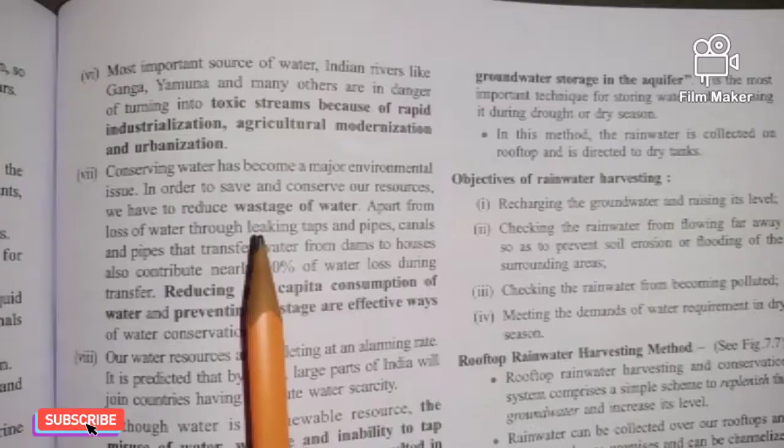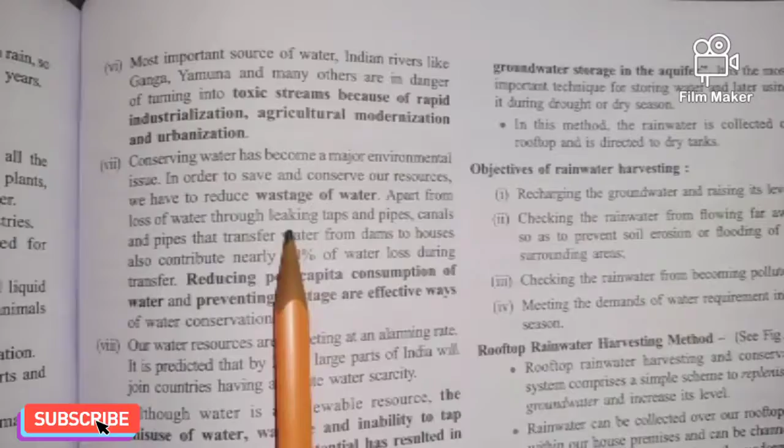Conserving water is one of the great challenges from the environmental point of view, because in order to save and conserve water resources, the foremost thing to be done is to reduce the wastage of water. Knowingly and unknowingly, water is wasted in great quantity, especially due to carelessness in bathrooms and washrooms. Taps are leaking, and there is a lot of discharge of water.

In other cases, most of the water is transported using canals and then pipes through dams, and during this transportation process, approximately 50% of water is lost. Because of that, there is a great need for conservation of water.

It is said that the per capita consumption of water has to be reduced, and some great methods of avoiding wastage must be applied.

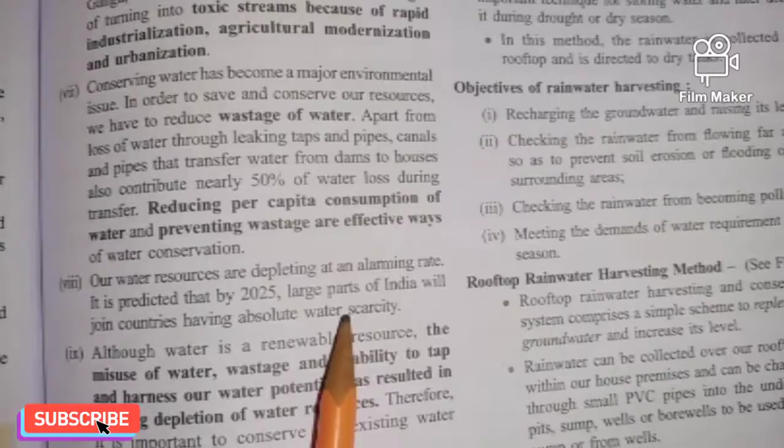The next point is that, though water resources are depleting, if this rate continues, by 2025 a larger portion of India will face severe scarcity of water, which will put India among the countries with absolute water scarcity. In order to avoid this, we should conserve water.

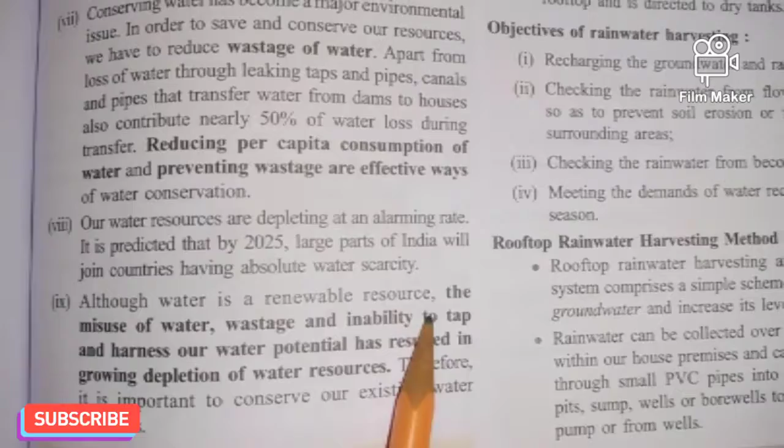The last important point on why we need to conserve water is that it is universally accepted that water is a renewable resource, but water is misused by industries. In homes there is a lot of wastage of water, and this wastage is not stopped. There are no proper functionings or methods to stop the wastage of water, and we cannot harness our water potential. Because of all these factors, there is a lot of growth in the depletion of water resources.

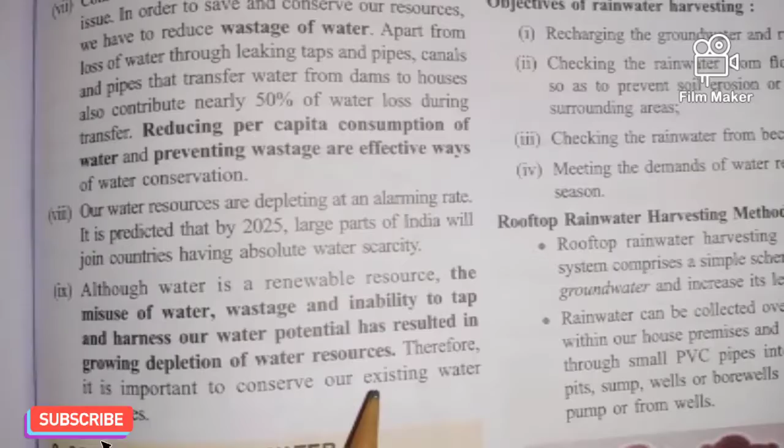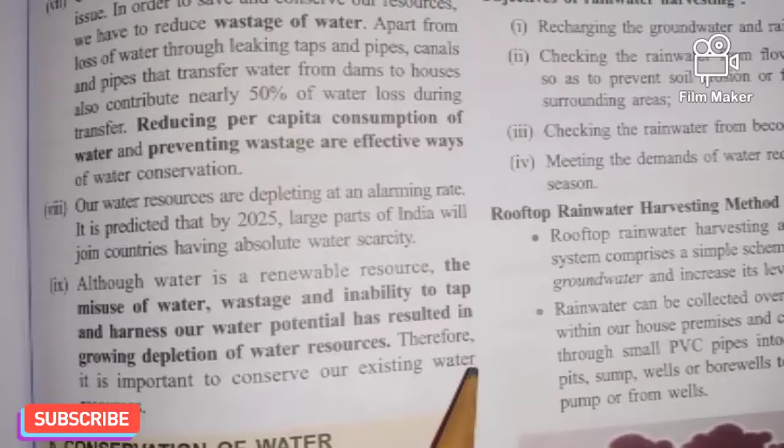So overall, considering all these points, we should feel that there is a great need to conserve water for the present generation and for the upcoming generation, because water is an essential part of life.

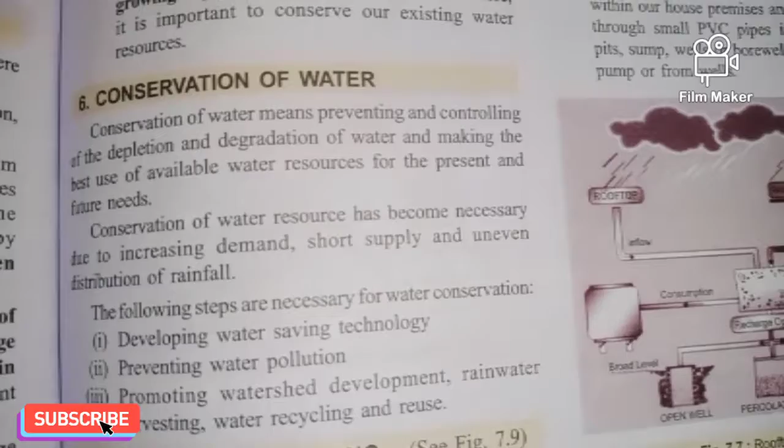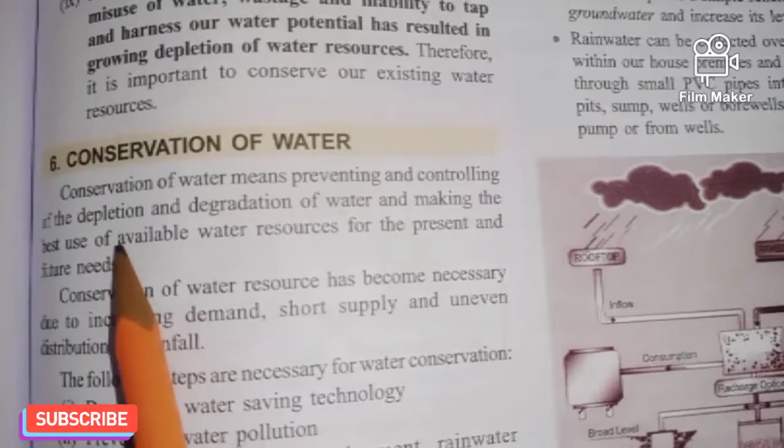Then there are some methods widely accepted to conserve water. Here we shall take a look at the factors and how we can try to conserve water. Conservation means preventing and controlling the depletion and degradation of water, so that the same water is utilized at its best level, not only for present but also for future needs. This is called conservation of water.

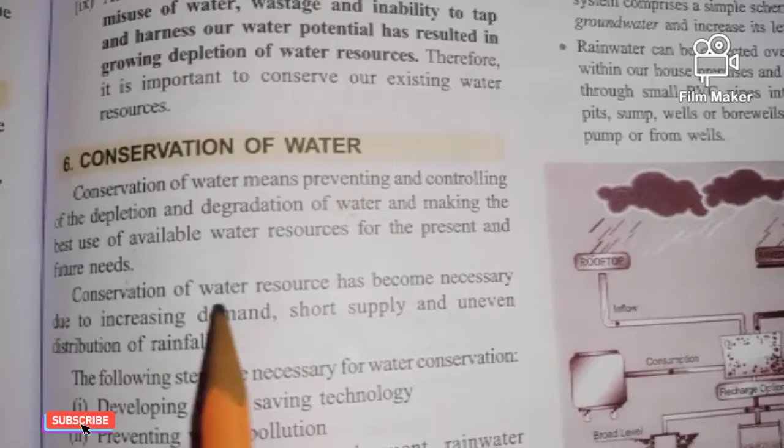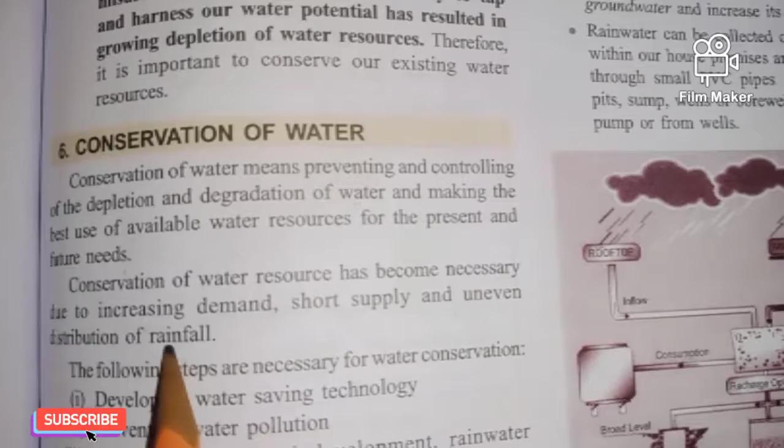Water, though it is an essential part of life, is in great demand, and there is an increasing need for it. There is a short supply and uneven distribution of rainfall. Due to this, conservation has to be done in a proper way.

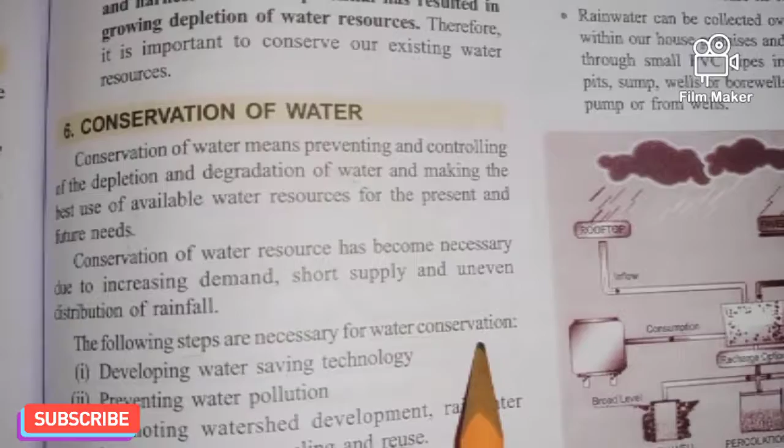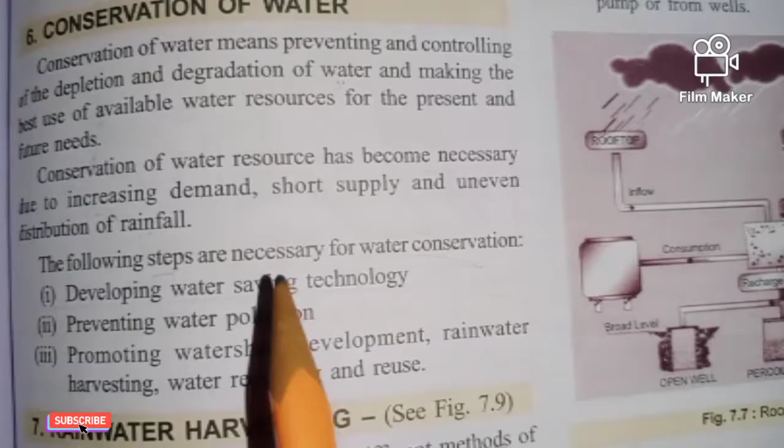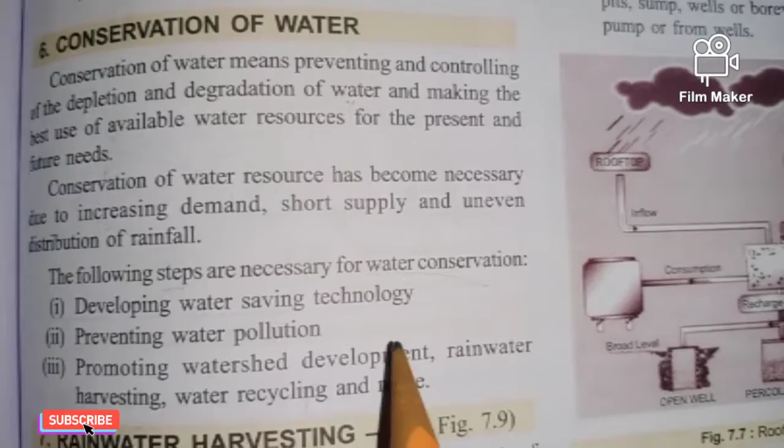So there are some steps recommended for the conservation of water. First, developing water-saving technology. We should develop technology that looks into saving water, because wastage of water has a great percentage in India. Then we need to focus on how we can prevent water pollution. Third, we need to promote watershed developments, rainwater harvesting, and water recycling and reuse. These are some of the modern methods we need to apply, and they are widely accepted to conserve water to a great extent. So we should focus on rainwater harvesting.

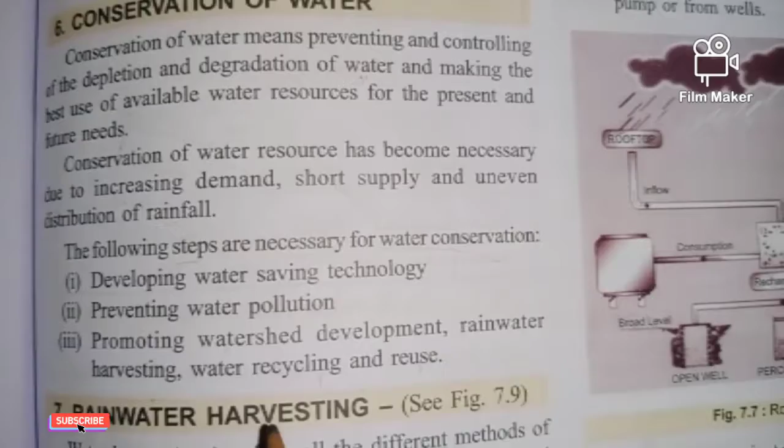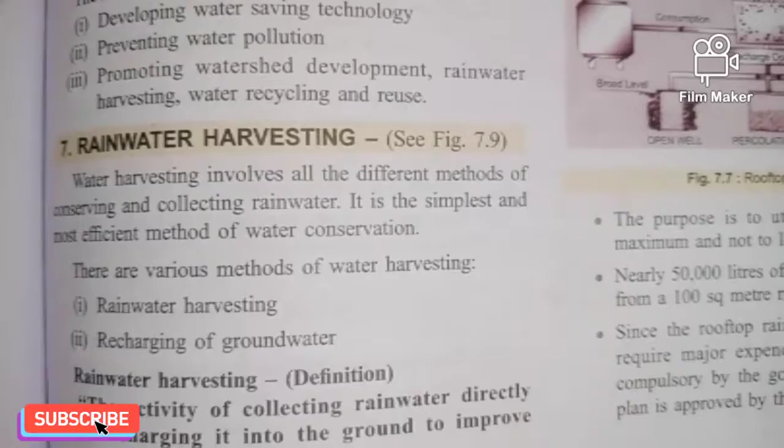This is one of the most essential and easily available methods for the conservation of water. So now we shall discuss rainwater harvesting, its methods, and how it is helpful in the conservation of water. Let's take a look at this effective method of rainwater harvesting.

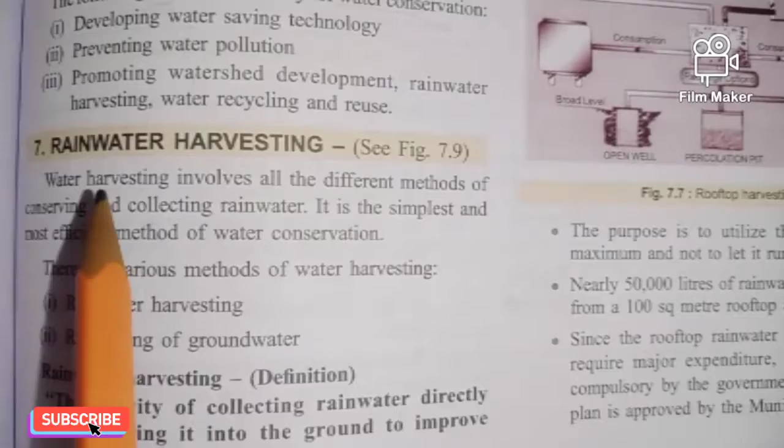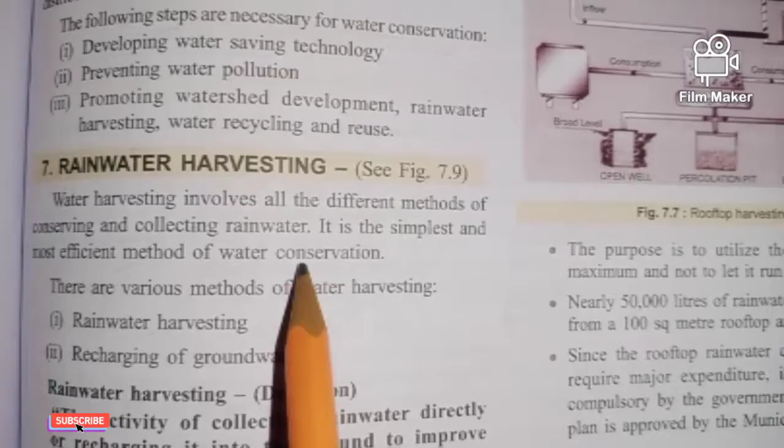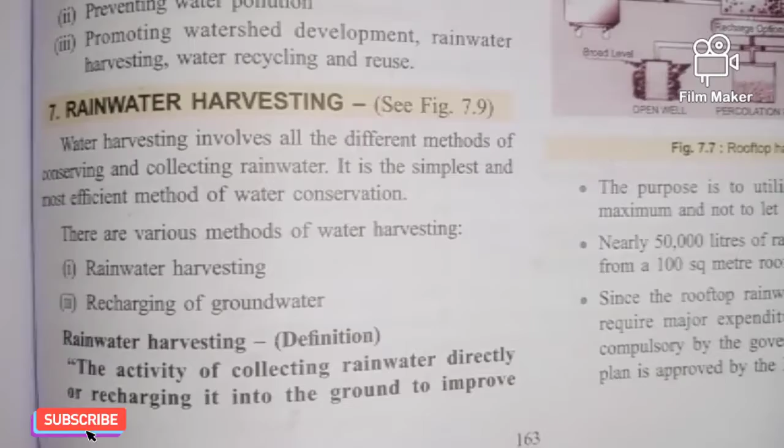Water harvesting means in this method we not only collect the water but also conserve it for future use, especially the rainwater. This is one of the simplest and most efficient methods of water conservation, because it doesn't require lots of technology, methods or investments, and it is easily applicable in most parts of the country.

Water harvesting by rainwater can be done by two different methods: first, rainwater harvesting, and second, recharging of groundwater. We shall study about these one by one.

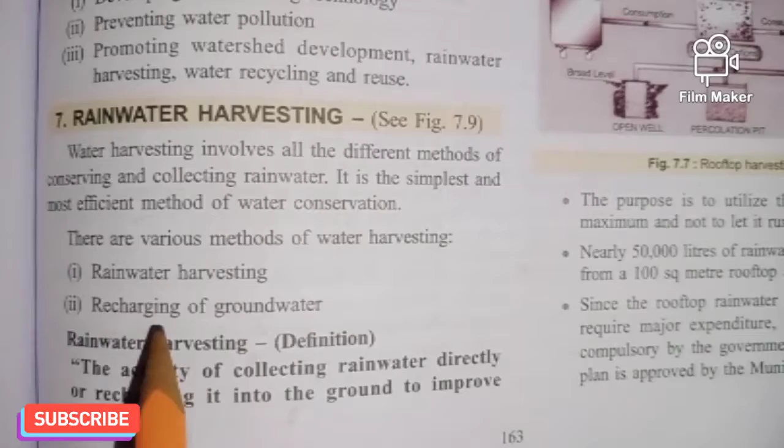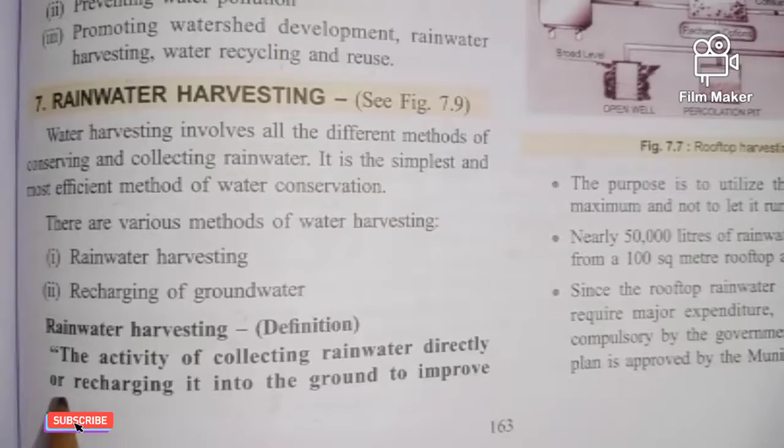What is meant by rainwater harvesting? Rainwater harvesting means the activity of collecting rainwater directly, or recharging it into the ground to improve the groundwater storage in the aquifer. It is the most important technique for storing water, and it can be used during dry and drought situations.

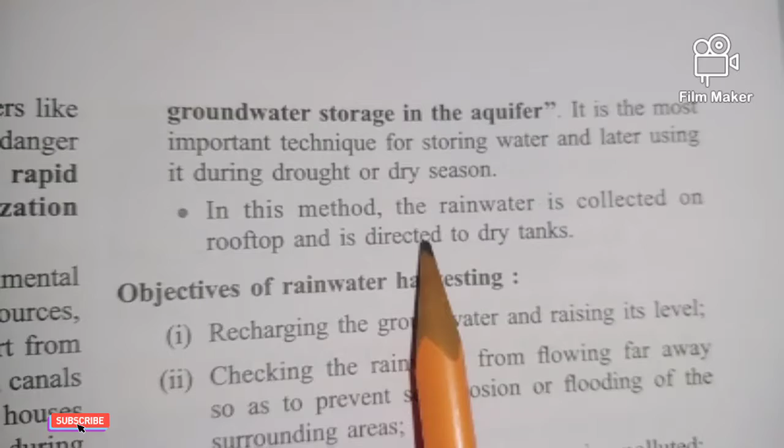While rainwater harvesting, the water is collected on the rooftops, and from there it can be directly led or transported to the dry tanks.

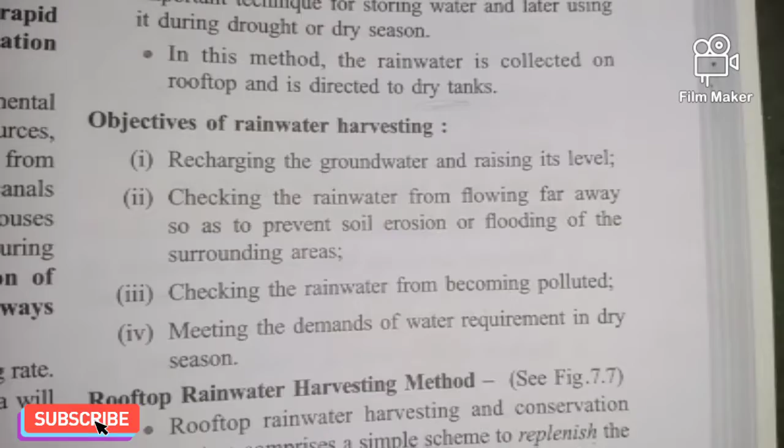Once we decide to have rainwater harvesting, why should we do it? It's not only the method of conserving water, but there are multiple usages of rainwater harvesting. The first one is recharging of groundwater and raising its level, so we can improve the groundwater level.

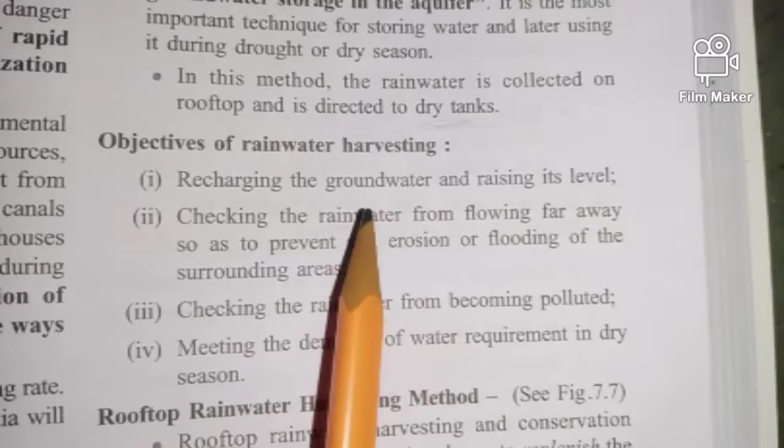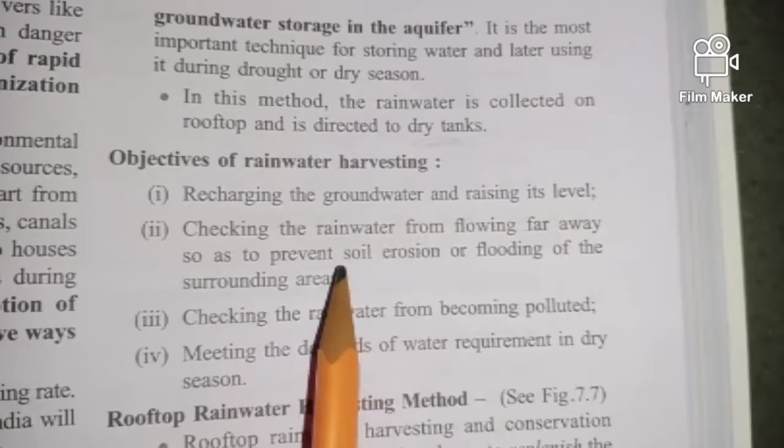In case of scarcity of water, we can draw this water with the help of tube wells and tanks. Second, the rainwater which is about to flow away along with soil erosion and flood surrounding areas and drain directly into the sea - we can stop this and store the water, so water cannot be easily drained into the sea, and we can stop soil erosion plus floods too.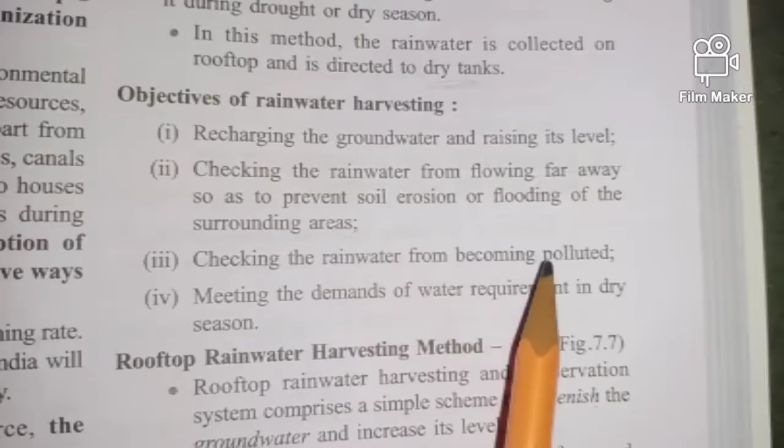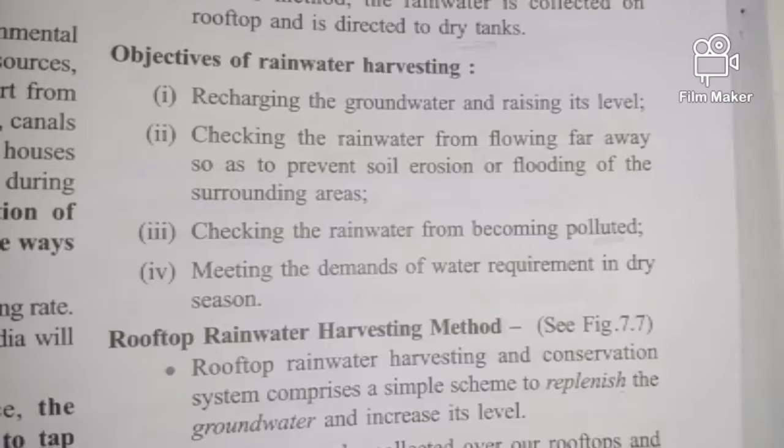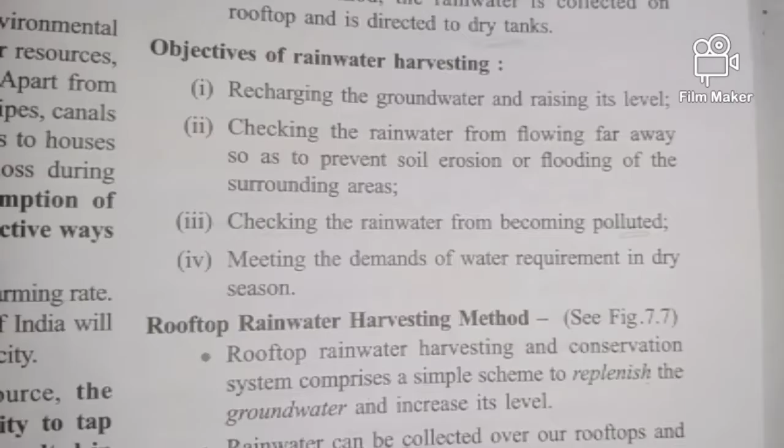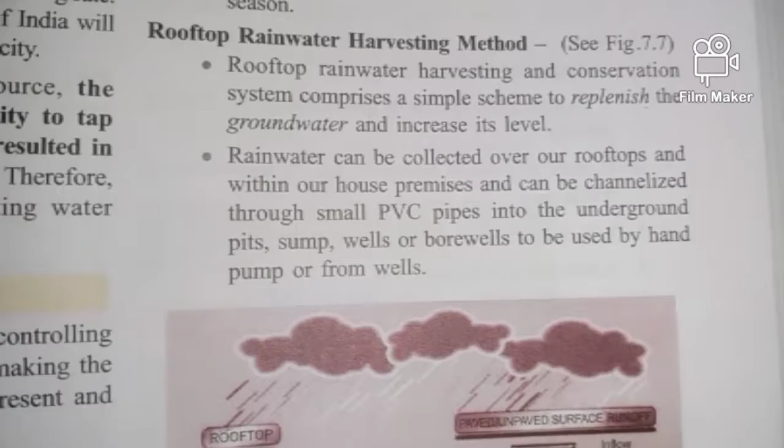Next, rainwater becomes lots of polluted. If we store this, we can try to stop the pollution of rainwater. And the last one is meeting the demand of water requirement in the dry season - the stored water can be specially used during dry periods. These are the objectives, and they help us conserve some amount of water in large quantity.

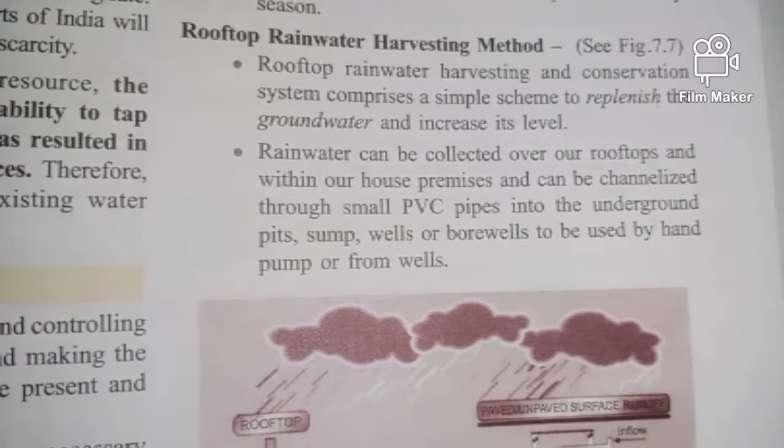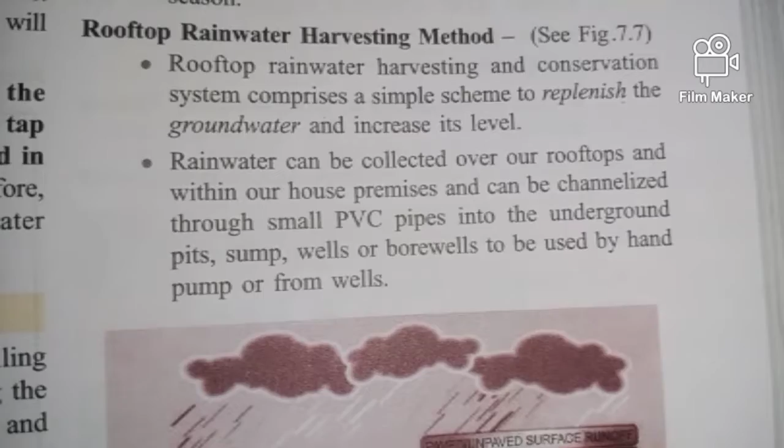There are some methods for how we can harvest rainwater, and this method is called rooftop rainwater harvesting. How does it work? Look at the diagram plus the definitions and important meanings.

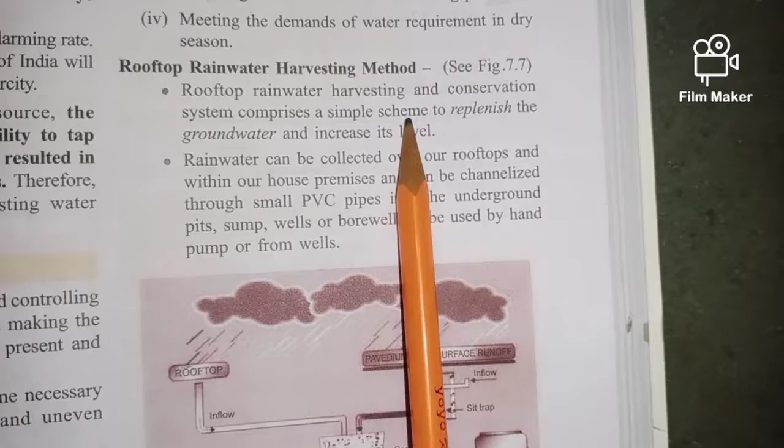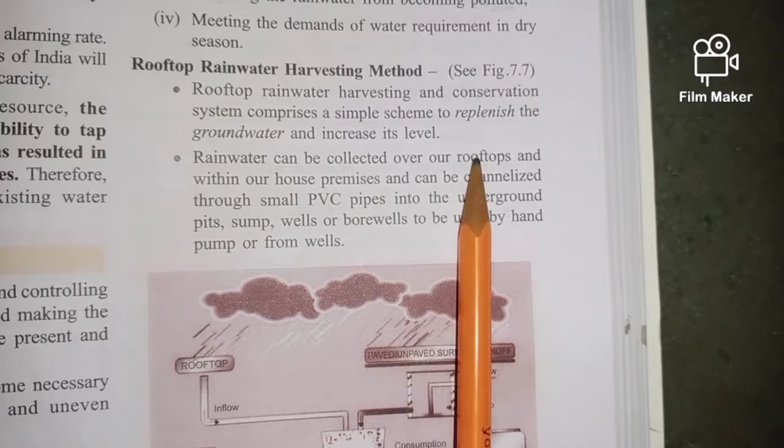Rooftop rainwater harvesting is a simple scheme to replenish the groundwater and increase the groundwater level. How is it done? It is collected over the rooftops, especially with PVC pipes in our house premises. These PVC pipes are channelized to different parts of water storage capacities, just like pits, sumps, wells and bore wells.

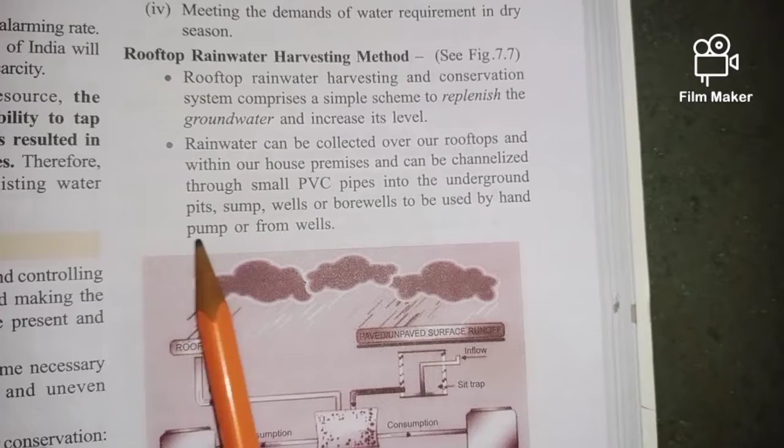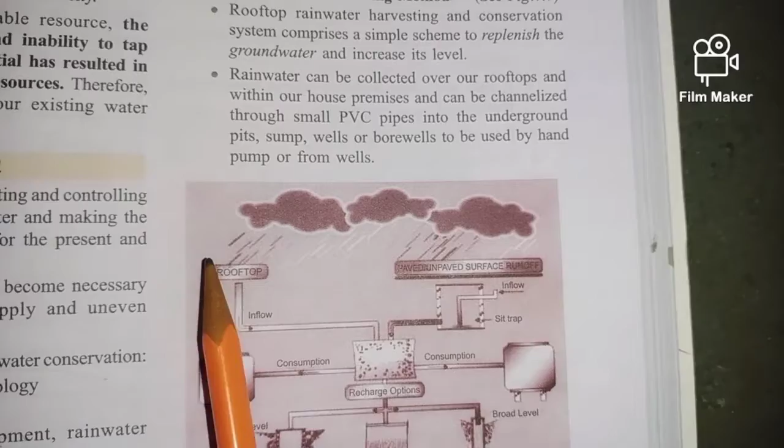In all these areas the water is collected, and this collected water can be drawn later on in the dry or drought season. Looking at the diagram, from the rooftop the water is collected through PVC pipes, and through these pipes it can be used for consumption, or it can recharge into open wells, percolation pits or bore wells, and later on for consumption purposes we can draw it out.

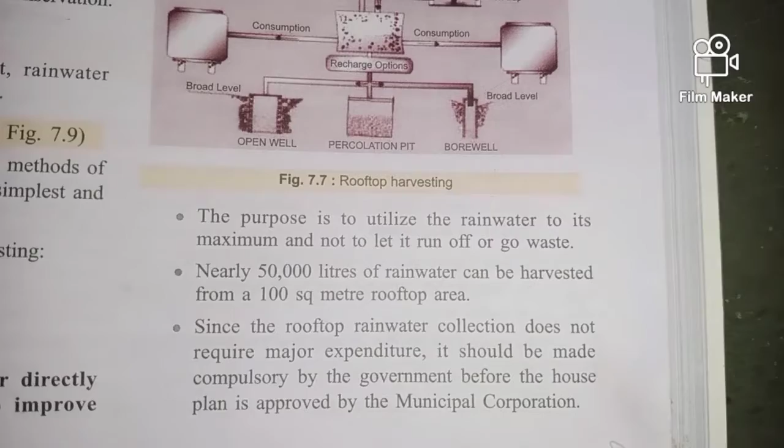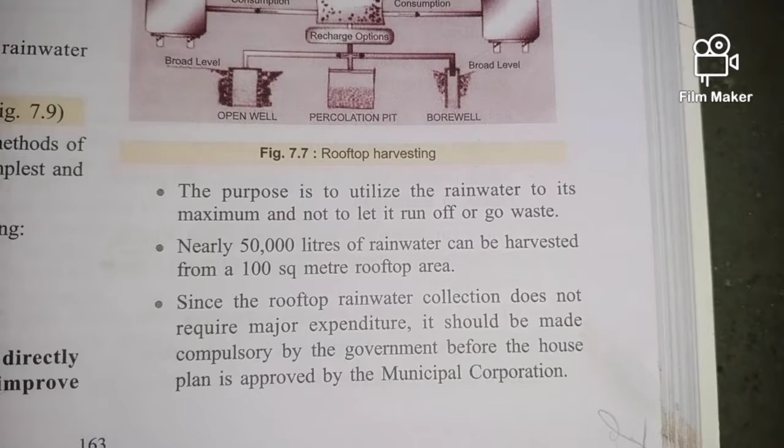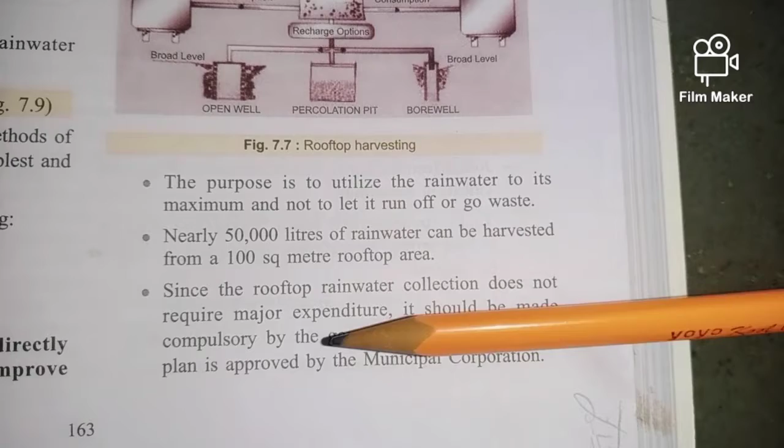This is a very simple method which doesn't require lots of effort. The basic purpose of rainwater harvesting is to maximize and utilize rainwater which will otherwise go waste. Nearly 50,000 liters of rainwater can be harvested from a 100 square meter rooftop area, which is a great amount of water we can easily store, and it does not require lots of expenditure - the cost is also very low.

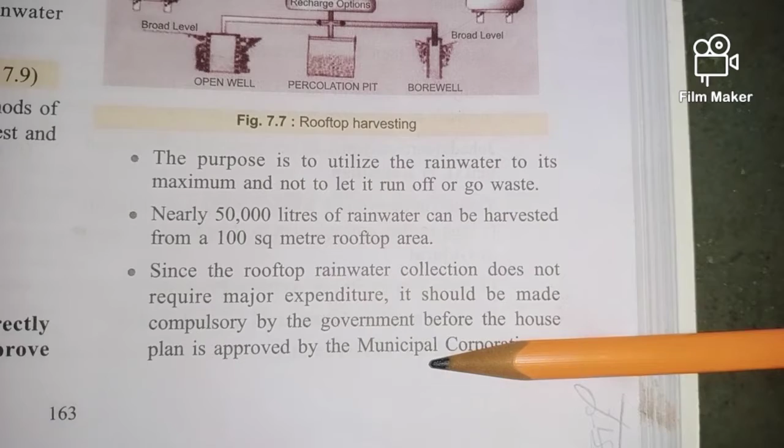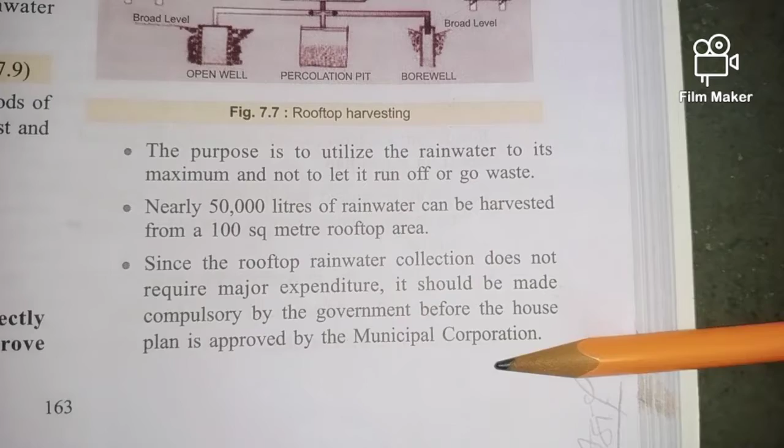So it is expected that the government should make it compulsory for all people who are about to build new houses, so that they can easily store water for themselves and their full family. The government has to make some kind of compulsion before approving the plan.

Rainwater harvesting is widely used in Andhra Pradesh, Tamil Nadu, some parts of Assam, Rajasthan and Maharashtra, and many states in the country have made it a government policy. This is a very simple, practical and cost-effective technique, so it can be practiced by any individual in villages or in cities.

This is a very simple method which doesn't require lots of effort, and the cost can easily be accepted. With the help of government, every individual can help to some extent to prevent the wastage of rainwater and try to stop water loss with the help of rainwater harvesting. This is the best method applicable for the conservation of water.